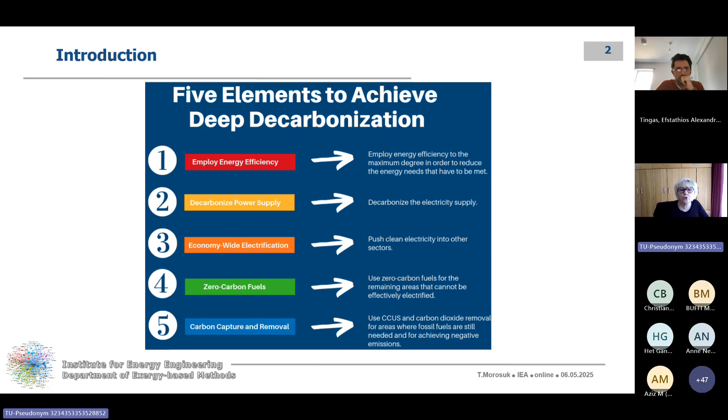So actually, the third hydrogen wave came because hydrogen can be the solution for deep decarbonization, not only of the energy sector, but also metallurgy, transportation, and so on. So if the hydrogen economy is very well established and becomes full reality, it can contribute to all five goals of deep decarbonization. And since we're discussing the hydrogen economy, definitely the hydrogen supply chain should be discussed.

And we know that the supply chain in general is everything from production, regardless of how this fuel will be produced, particularly when discussing hydrogen, to how it can be used. This very nice graphic was developed by Siemens Energy in Germany, and we clearly should distinguish between upstream, meaning production, midstream, transportation together with storage, and downstream, the use of the hydrogen.

It is really very interesting that the use of hydrogen we already know, and it is very well known to us how efficiently hydrogen can be used if hydrogen is available. During the second hydrogen wave, as I mentioned approximately 20 years ago, there was intensive discussion of how hydrogen can be produced. And now we are facing the biggest problem, how hydrogen can be transported.

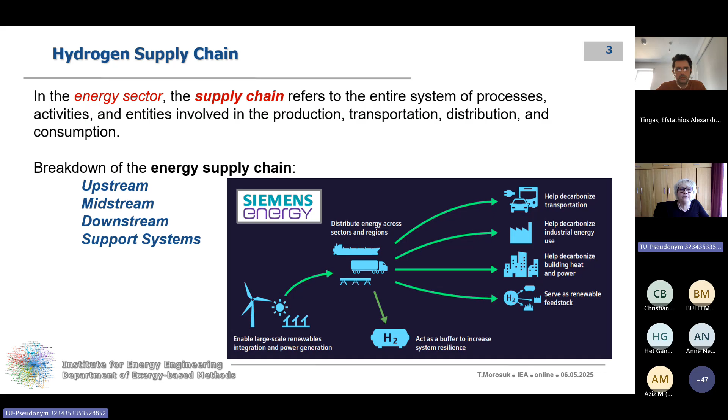And when we discuss hydrogen production, it's always very difficult to explain hydrogen production methods and technologies. Therefore, the concept of a color scheme was also applied to hydrogen. And very often we just mention, for example, green hydrogen, blue hydrogen, and immediately people understand what it means. So this hydrogen code or scheme is very good for communication and for clear understanding of production methods, not the entire chain.

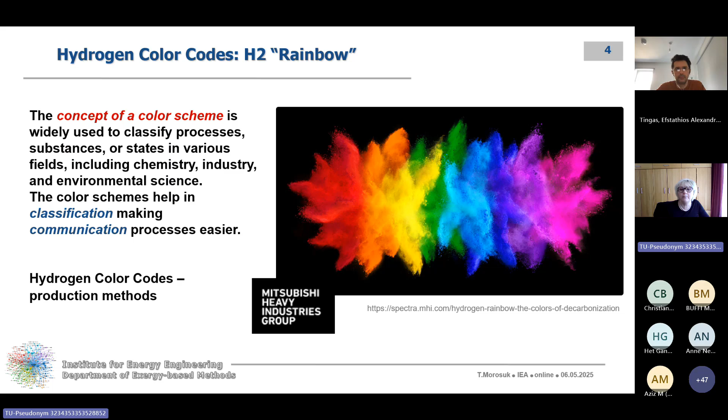And it is very interesting that Mitsubishi Heavy Industries, for the first time, proposed the so-called hydrogen rainbow. But unfortunately, this idea did not last very long, because people already started to discuss many different hydrogen production methods and particularly combinations of these methods. And the same company proposed the hydrogen color rainbow, extended into the hydrogen color wheel. This also has many production methods of hydrogen, but only pure methods of hydrogen production.

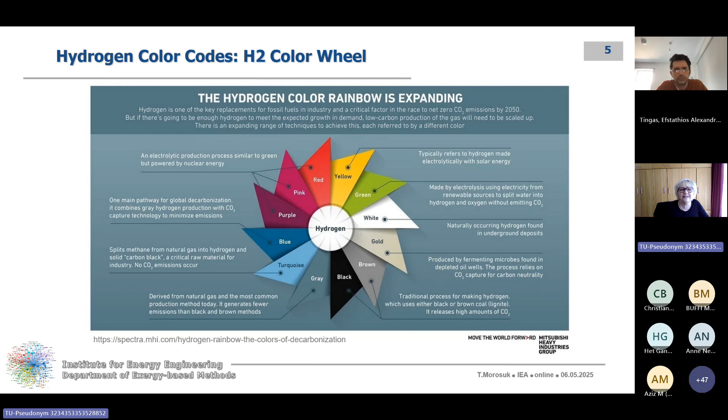And in this period of time, I discussed it in my research group, and we found out that the color wheel is, of course, an interesting approach, but it is not something natural. And we would like to discuss something natural like a rainbow, but include all hydrogen production methods. And from this work came our idea, the idea of Technical University Berlin, my university, and my research group. It is the peacock of hydrogen. We know that this bird is very colorful, and using this natural colorful idea we can discuss all hydrogen production methods.

Therefore, when we discuss all these colors of hydrogen production, it involves not only which sources come into hydrogen production, but also how molecules finally come to produce hydrogen, as well as the technologies and carbon intensity of all these methods. We published a paper, and at present this hydrogen color code is the one we proposed to the international community to discuss hydrogen.

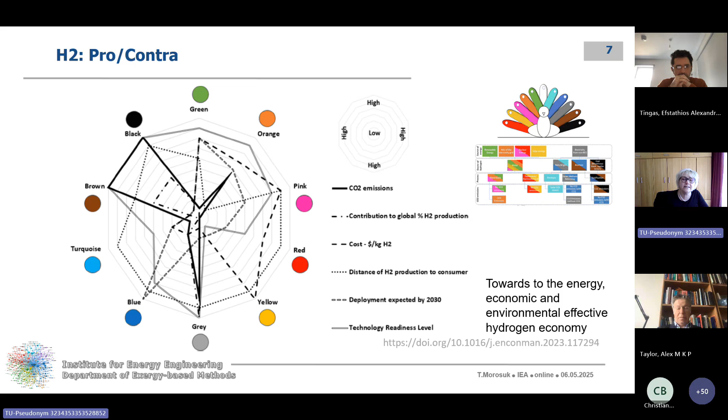Definitely, all of these methods have advantages and disadvantages, and we conducted a multi-criteria analysis, including, of course, cost and environmental impact of all methods, but it is also very important to discuss technology readiness level, because we can optimize, we can predict cost, we can assume something, but it is always very important to discuss which technologies already exist and at which level. And it is also very important to discuss large-scale hydrogen production, because it should be worthwhile.

So we discussed which countries produce and plan to produce which kind of hydrogen, using the color code. And the most important thing is that, unfortunately, countries that produce hydrogen and countries that would like to use hydrogen are far away from each other.

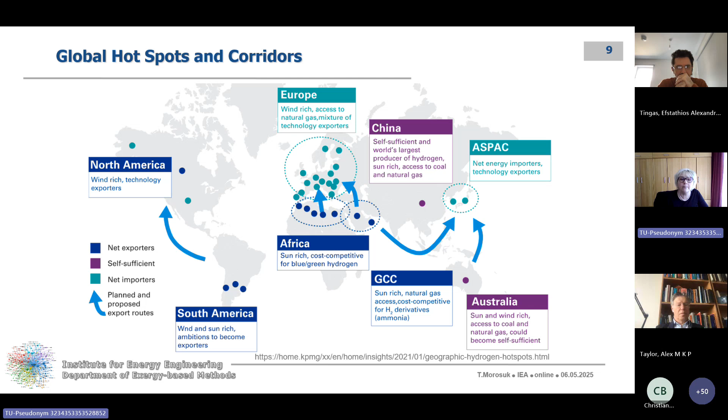In the first presentation, we already heard about the hydrogen market in Asia, where we definitely need long-distance transportation between countries. So now to come to transportation: usually we assume that transportation exists and we can use other facilities and infrastructure, but in fact it is not absolutely the same, and we need to pay attention to the very special properties of hydrogen.

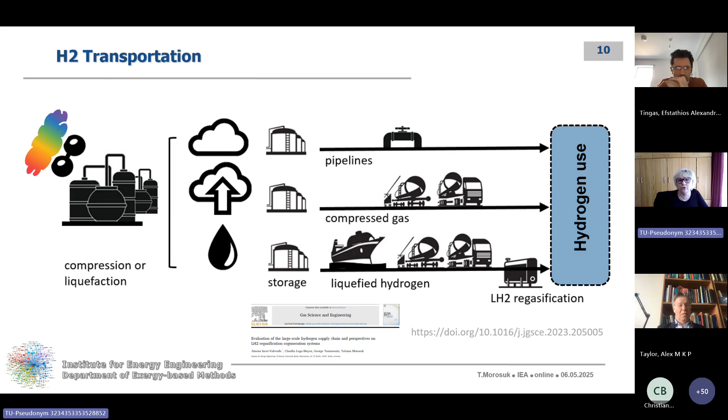So hydrogen in general can be transported using three options: with pipelines, in compressed form by railway or trucks, and also in liquefied form with tankers for long-distance ship transportation. But liquefied hydrogen requires one more option. It is regasification of liquid hydrogen, similar to LNG.

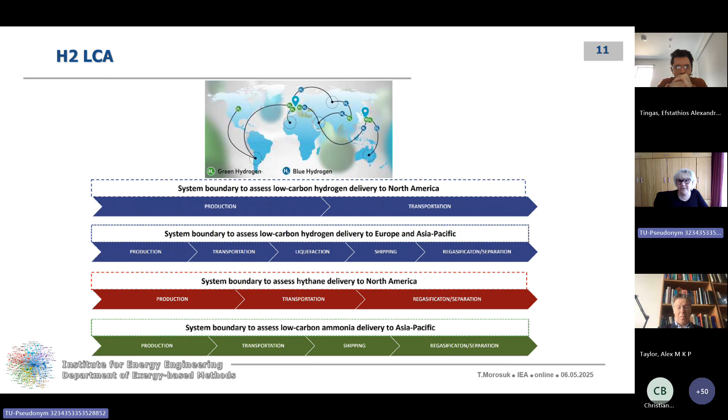Okay, and about transportation, we cannot ignore this topic, because if we conduct a life cycle assessment, it does not matter whether it is from an economic, energetic or environmental impact point of view. Transportation plays a very important role and will always be included in the analysis, because transportation is the midstream of the fuel supply chain. And now I would like to give a little more attention to all the technologies for hydrogen transportation, and for which scale these technologies already exist.

So we will continuously use this scale of technology readiness level, and we know that level 1 is just a theoretical idea, and level 9 is already full practical application. And if we discuss the hydrogen economy, definitely we would like to be at the upper part of this scale. So let us discuss now technology by technology.

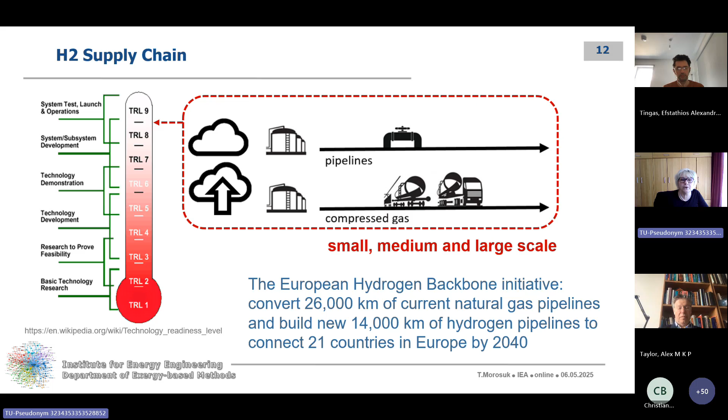For hydrogen supply using pipelines, and also hydrogen supply in compressed gas form, we have a technology readiness level between 8 and 9, so it means full industrial application for all scales, small, medium, and large. So from this point of view, we can say it is not a problem to supply hydrogen, because the technologies exist. Okay, not the full pipeline infrastructure exists, but compressed gas definitely can be supplied by railway and truck transportation. And we know there is already a European initiative to convert quite a lot of existing natural gas pipelines to hydrogen pipelines, and also build a new pipeline network for hydrogen transportation.

Let us discuss liquefied hydrogen, because liquefied hydrogen is the option for long-distance transportation. And we know that the highest technology readiness level exists only for small scale. Technology readiness level 7, the level of a pilot plant, exists for medium scale, but for large scale we are still in theoretical discussions, with still no established infrastructure that would let us say that transportation of hydrogen in liquid form is easy and can be applied between different countries.

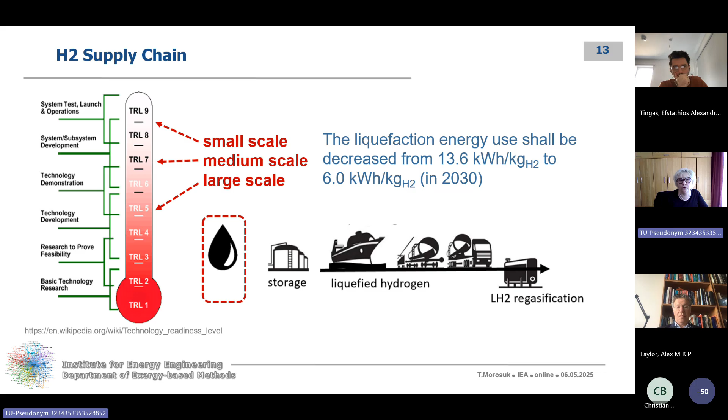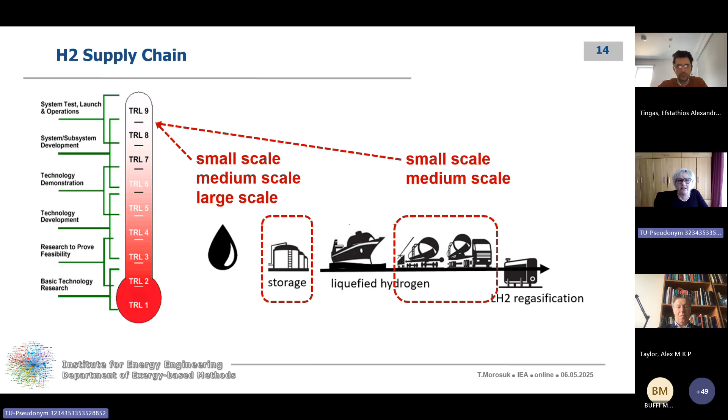Okay, let us move now to storage. Stationary storage of hydrogen, for example at the place of production or at the place where hydrogen will be used, exists at a high technology readiness level for all capacities, small, medium, and large, but transportation of hydrogen only for small and medium scale, because we never discussed large-scale capacity, simply because it was not required, and now it is required, and we need to discuss these technologies.

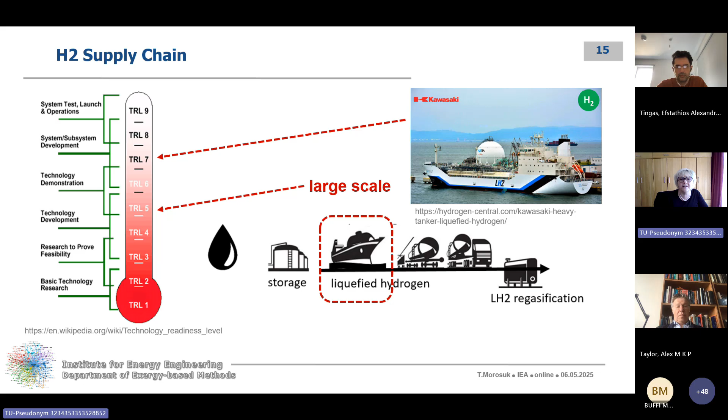Another aspect is the transport of hydrogen in liquid form. Our idea, of course, is to use tankers similar to LNG, but we should clearly say that at present we have only one tanker with small capacity, and this is Kawasaki production. It is only for demonstration, it is a pilot plant. Therefore, to make any optimization or any prediction of cost for liquid hydrogen transportation is very difficult, because we have only one particular example proving this technology will work. Unfortunately, there are no more examples from which we can extract some data.

And as I already mentioned, if we discuss liquid hydrogen transportation, we need regasification. Regasification exists only at small scale. This is quite popular, similar to regasification of cryogenic liquids such as oxygen and nitrogen. This is well known.

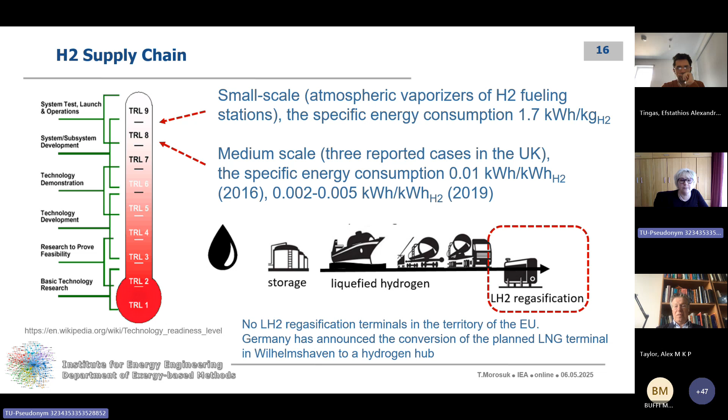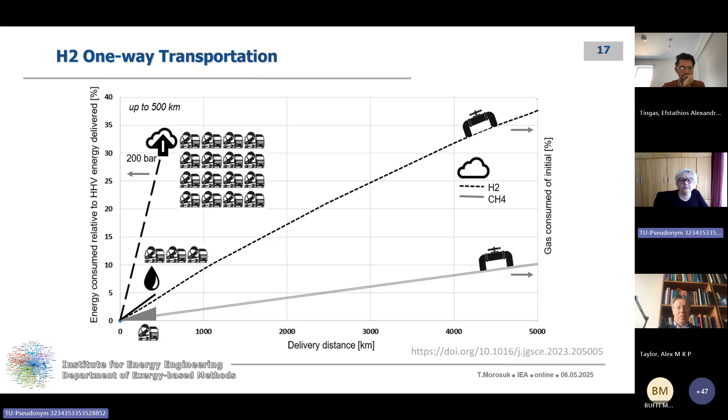But for the hydrogen, there are only few examples in the UK of medium scale. Large scale regasification does not exist. And my research group, we are doing actually the first attempt in this direction to discuss the large scale regasification of liquid hydrogen. And now the transportation of hydrogen to the long distance, not with ship transportation, only with ground transportation, with pipelines or with trucks.

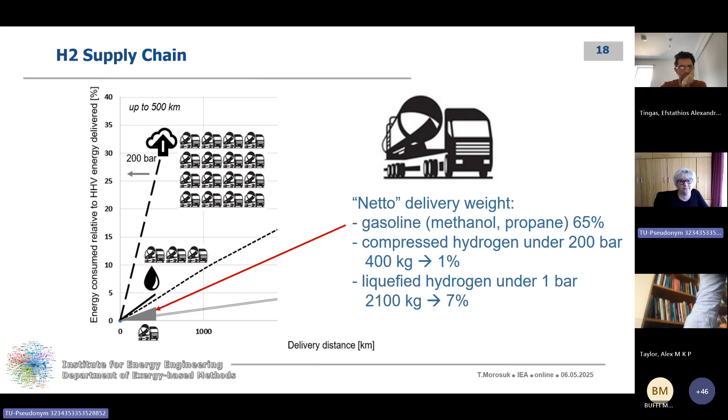And we can see that if, for example, any of gasoline fuels, methanol or propane or any other fuels will be transported with the truck, then 65% of the mass of the entire truck with fuel will be fuel itself, and only 35% is truck. But in case of compressed hydrogen, only 1% is fuel and 99% is just transportation of the vehicle itself. And for the liquefied hydrogen, it is 7%. So it means that during the transportation, the largest weight is the truck itself, and fuel is a very small part of the weight.

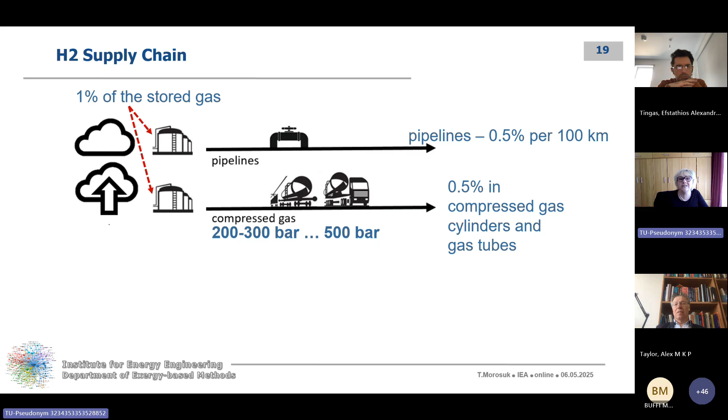Okay, now we also should discuss leakage of hydrogen during the transportation. For example, 1% of the stored hydrogen is leakage during the storage, and with pipelines we have 0.5% per each 100 kilometers. And if we would like to transport hydrogen to very long distance, we should keep in mind this leakage, and also in compressed gas.

Much more problems we have with the liquid hydrogen, because we have boil-off gas, which is not deeply investigated at present for liquid hydrogen. We know this problem because of LNG, liquefied natural gas, but everything which is related to hydrogen still should be evaluated, and also loading and unloading, we have leakage of 5% of the amount of hydrogen. So with this expensive fuel, we continuously will have the problem.

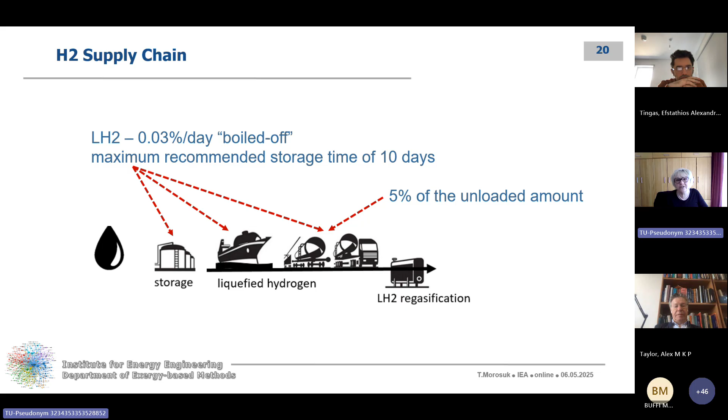And all these problems, or better to say challenges, that we have with hydrogen economy definitely brought us to another status, that we need to discuss alternatives. So long distance transportation of hydrogen will cause a lot of problems, and we don't know yet the environmental impact that will be associated with that, and also risk analysis. This can be a big discussion and research in the field of risk of hydrogen.

Therefore, we have alternatives. We have methanol as energy carrier with a very high percentage of hydrogen. It is hydrogen transportation inside of chemical substances, and also ammonia. And again, I will refer to the first part of today's presentation, because I already mentioned that methanol and ammonia could be the most attractive ways for transportation of hydrogen inside of chemical substances.

And actually now we're discussing more and more the attraction of ammonia as the fuel and chemical substance that contains a lot of hydrogen, and after that, through cracking of ammonia, hydrogen can be liberated from ammonia, and ammonia can be used as a fuel rich with hydrogen, and also hydrogen can be used as a pure fuel.

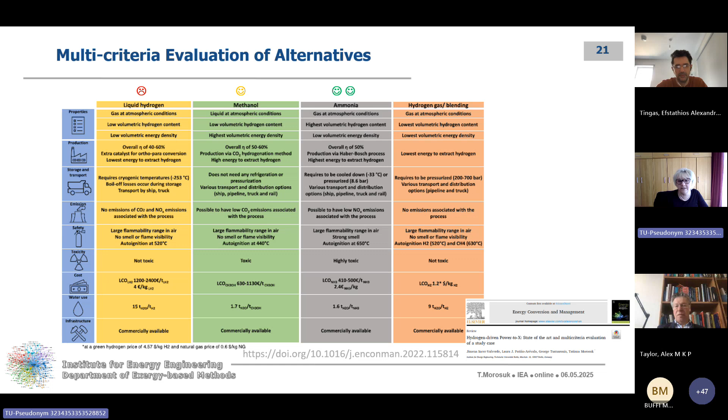And the last what I would like to say, that if we would like to proceed towards hydrogen economy, definitely we need to discuss energy aspects, so how much energy is required to produce hydrogen, transport hydrogen. Also, we need to discuss economic aspects. We should discuss environmental aspects, but we need to discuss everything together. But on top of that, we should always be addressing the technology. Technology exists or technology does not exist.

And if technology does not exist, maybe it makes sense first to look to the technical realization of this technology, and after that we can discuss already if this technology is economically meaningful, environmentally friendly, and thermodynamically efficient. But first of all, the technology should be meaningful.